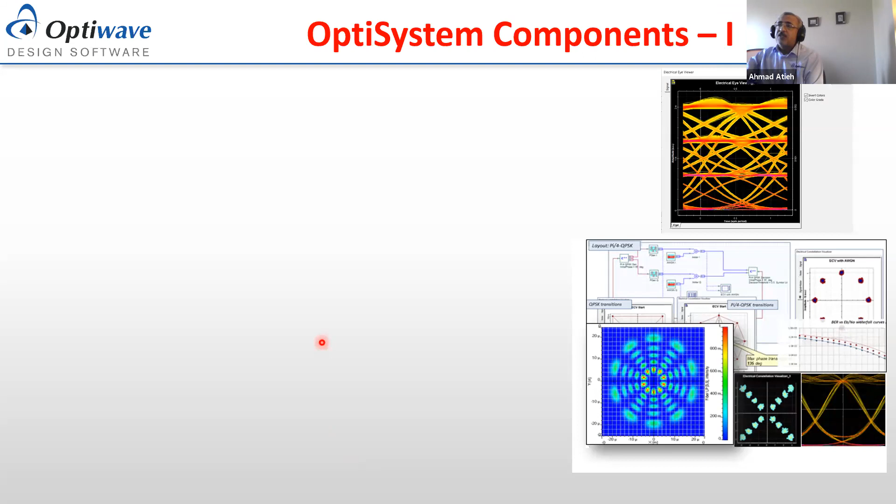Now, Optisystem has more than 540 components, and these components are categorized in directories where you can click on them and use them. This component library can be summarized in a couple of slides here.

The first one is the sources. You have different CW lasers, LEDs, VCSELs, DFB models, Fabry-Perot, white light sources.

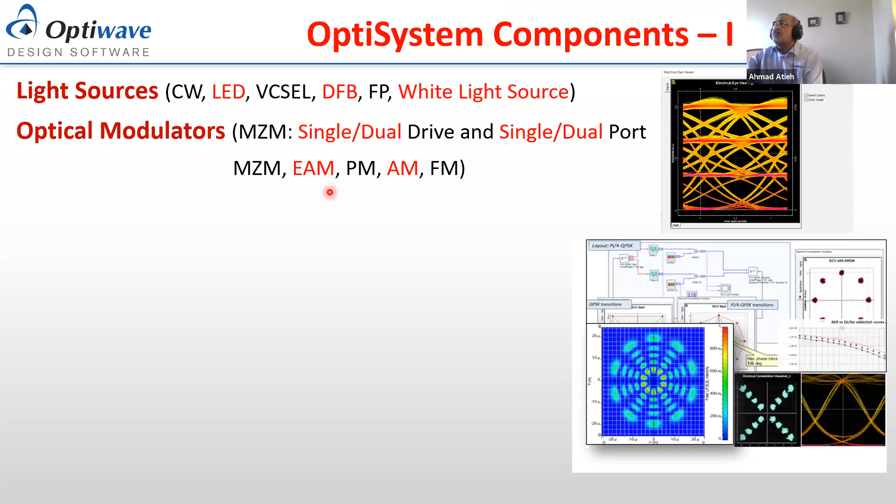Modulators, you have lots of types of modulators. You can have analytical models for Mach-Zehnder modulators, single drive, dual drive, or single port, dual port Mach-Zehnder modulators. Electro-absorption modulators, you also have phase modulators, amplitude modulators, as well as frequency modulators.

Bit sequences: we have components for pseudo-random bit sequences, user-defined sequences, or compliance test patterns as well. Optical fibers: we have single mode fibers, multimode fibers, multicore fibers, which is mainly today's webinar topic.

Also we have electrical modulators which can support OFDM, quadrature modulators. Modulation formats: you have all types of formats, return-to-zero, carrier-suppressed return-to-zero, duobinary. You can support differential phase shift keying, any type of MPSK, quadrature as mentioned, pulse position modulation, and optoelectronic components.

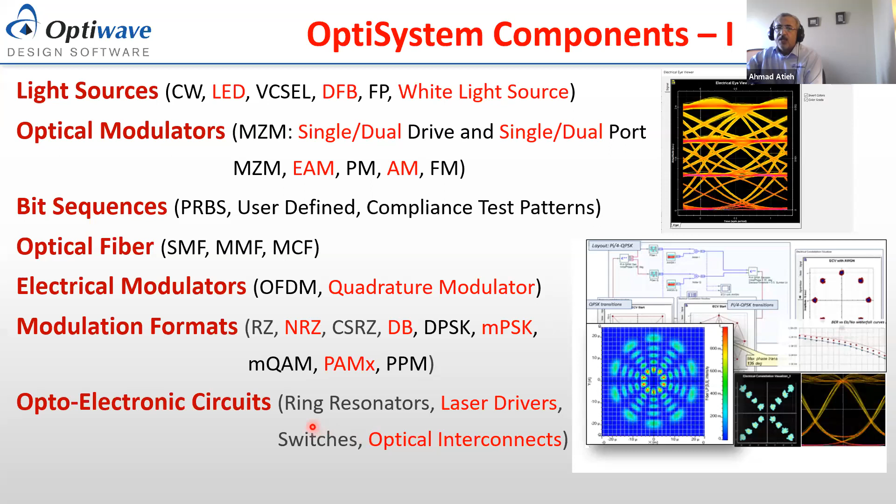With the help of OptiSpice, you can integrate components like ring resonators and optoelectronic components within Optisystem to work together, plus laser drivers. As you can see, there are different switches in the Optisystem component library.

Signal processing: we have very powerful DSP components, equalizers, electronic equalizers, optical equalizers, regenerators—1R, 2R, 3R, depending on what type of regeneration you want to do. FEC and bit mapping: there are different types here.

Detectors, we have our models for the pin detectors, APD. Optical amplifiers, as I mentioned, all types of doped materials are available to do designs, or you have blocks of amplifiers as well. You can do optimization, as I mentioned, for gain flattening filter. We have waveguide as well as models for amplifiers. Electrical amplifiers include transimpedance amplifiers, limiting amplifiers, and automatic gain control amplifiers. Passive components, any component you can think of in the optical domain would be available in Optisystem, from multiplexers, couplers, arrayed waveguides, switches, attenuators, circulators, polarization controllers, and so on.

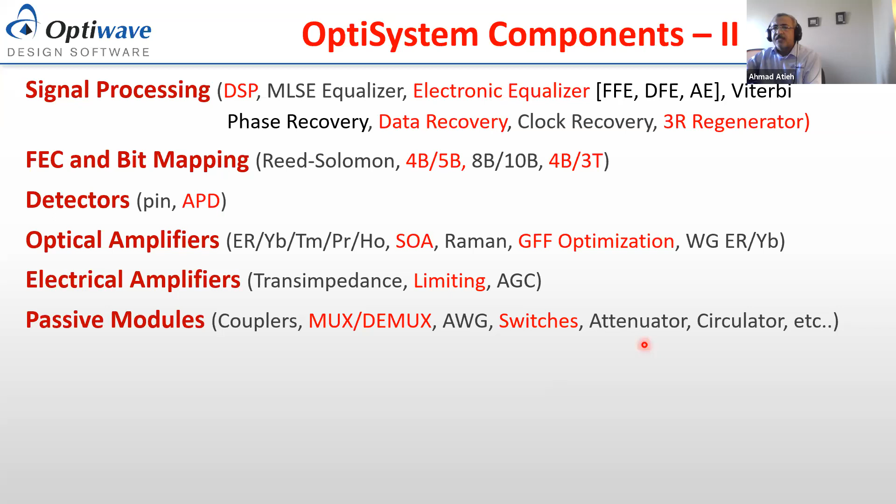Multimode components: you have the fiber, which is multimode fiber, multimode amplifiers, and mode generators. You can work with linear polarized, LG modes, whatever type of modes you are interested in. There are also passive multimode components and spatial visualizers.

Optical channels, as we saw, like we have fibers to support the physical channel, or space wireless channels like Li-Fi, satellite, and free space optics.

Visualizers, Optisystem has a huge library of visualizers and equipment. You can see optical signals with it, electrical signals, binaries, M-ary. There is test equipment as well, and this is coming up in the new release: the Opti instrument component, where you can communicate with instruments and get data from instruments and use it in Optisystem. Most of the components can support bidirectional components, so you can go from east to west or west to east in your transmission systems.

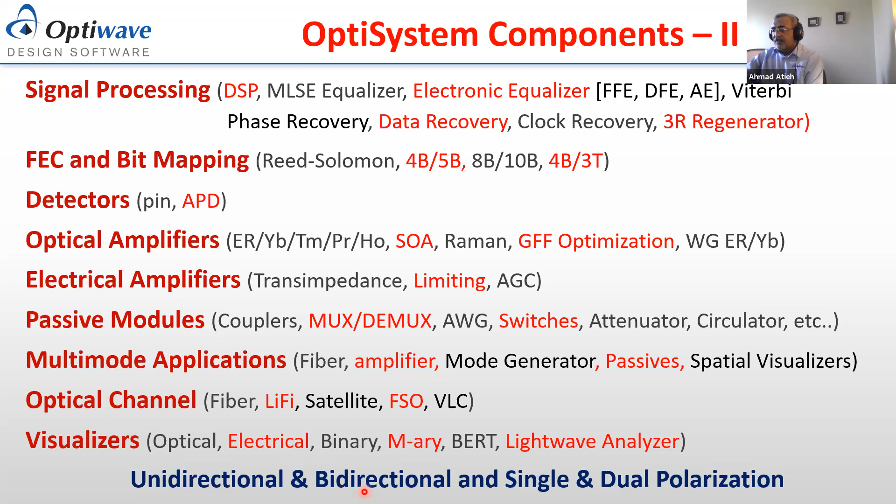Spatial multiplexing through either a few modes where you have a single core multi-mode fiber, or you can use multi-core single mode or multi-mode fibers to carry more channels, and with that you can increase the capacity drastically.

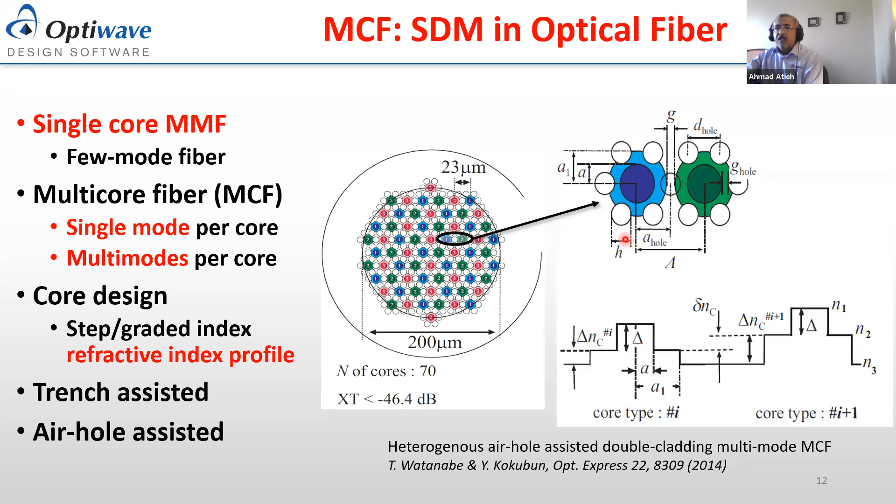In OptiSystem, currently in release up to 18.0, we have analytical models with different components: a multi-core fiber component where you can calculate the crosstalk between different modes, another component for calculating the effect of bending radius on crosstalk, and another for calculating the effect of core pitch between cores on crosstalk.

In the next release, coming sometime in September or early October, we're going to have a new component called Universal Multi-Core Fiber. This component will be able to communicate with OptiMode, so you can design your structure in OptiMode, generate mode profiles and effective refractive index, import them into OptiSystem, and calculate the crosstalk. After calculating the crosstalk, I'll show you later how to take that and calculate the effect on transmitted signals.

Now let me give more details about the analytical models in OptiSystem for the multi-core fiber. This is the structure of the multi-core fiber. You can have core 1 and core 2, and then trenches. These parameters control the radius of core 2, and this parameter controls the trench width and so on. As I mentioned, this component uses analytical models.

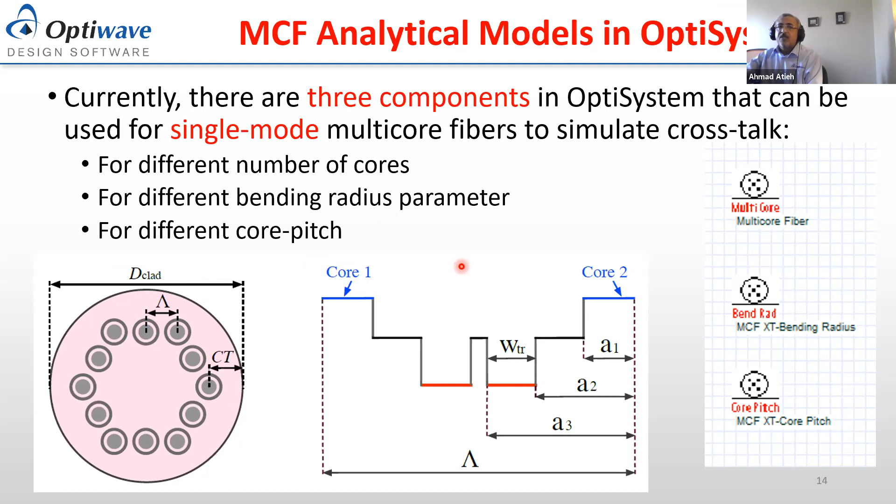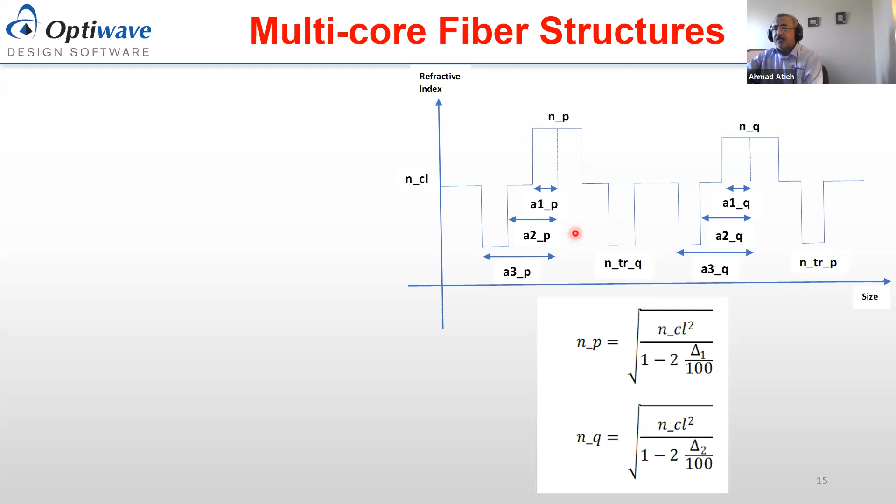In this component, you can control the number of cores, the bending radius, and the core pitch between the different cores. This is a general description of the refractive index profile. You can control the refractive index profile as you see, and then control the different parameters for the cores.

You can simulate almost every possible configuration: homogeneous with no trench, where core 1 and core 2 have the same refractive index profile with no trenches in the design; homogeneous with trench assisted; heterogeneous with no trenches; heterogeneous with trench assisted; homogeneous with one core having a trench and the other no trench; and heterogeneous with one core having a trench and the other no trench.

So the idea here is the flexibility in these OptiSystem components, which again use analytical models to calculate the coupling coefficients and the crosstalk. I'm going to show this to you in a few minutes. It's very powerful for doing all the kinds of simulation you need.

However, if you want to look into multi-mode applications and design your own structure, you can use OptiMode to design the structure, calculate the field profiles and effective refractive index, and then load that into OptiSystem to calculate the system crosstalk.

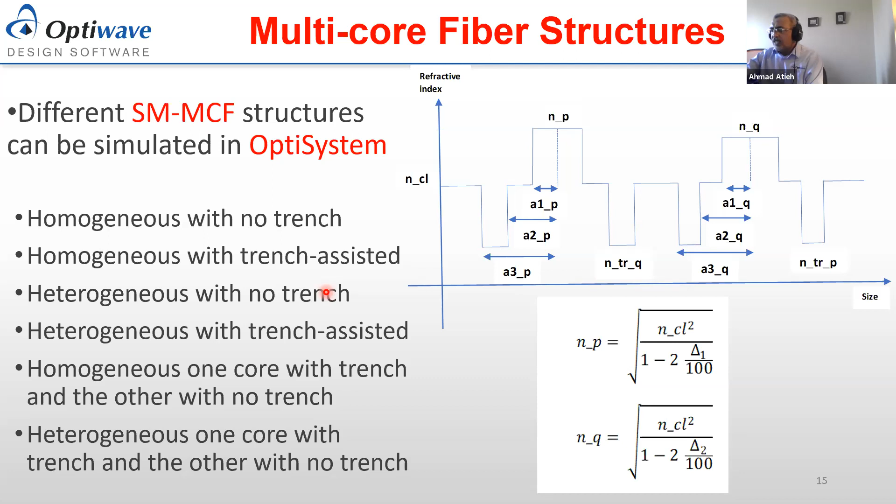The calculation of the crosstalk is based on the coupled power theory. The expression, as you see, is an analytical expression using these coupled equations, and the power for core P as a function of distance is given by this formula, where HPQ is the coupling coefficient between core P and core Q.

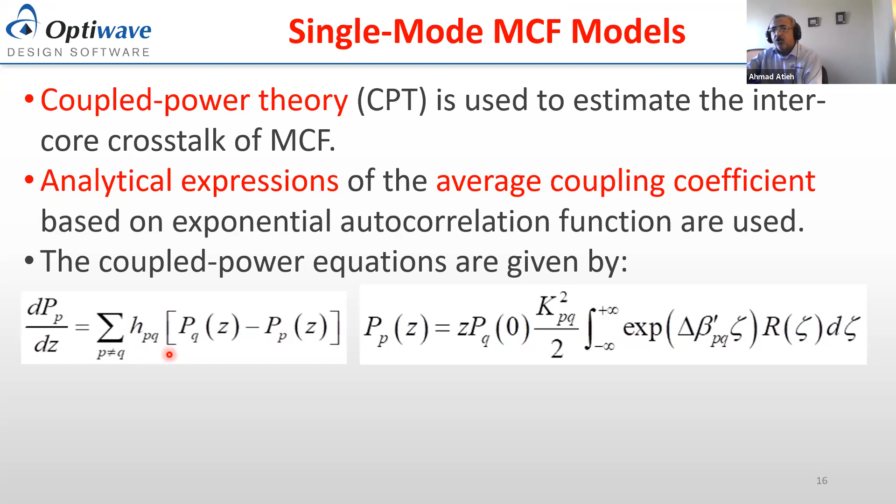In the OptiSystem component, once you double click on it, you get a pop-up properties window where you can enter the parameters: the number of cores, the bending radius, and so on. If you need help setting up the parameters, click the help button to access the component's data sheet, which includes an illustration of how the coupling works.

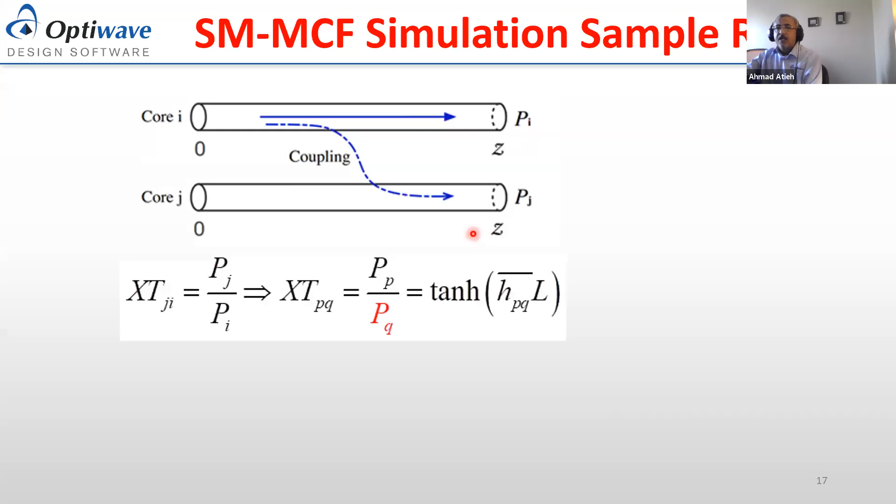So the light is going through, for example, core 1 here. Some of it couples to core 2, which is core j. Then you calculate the cross coupling between the two—the crosstalk between the two cores.

In the multi-core fiber component, you have an outcome of the calculation where you can see the coupling, the crosstalk between the different cores. For example, this is between core 1 and core 2, and core 2 and core 1, and this is core 3 and core 1, and so on. So all the crosstalk parameters are calculated and offered to the user.

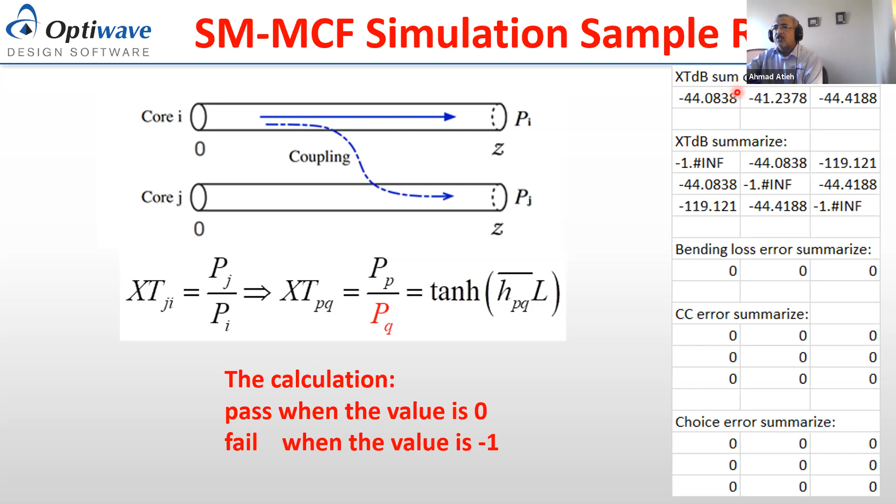This is the total crosstalk for core 1, core 2, and core 3. In this chart, I'll show you the component which models the effect of bending radius. You can sweep the bending radius and get the crosstalk as a function of it. The third component allows you, after designing the multi-core fiber parameters, to see the effect of core pitch when you sweep it, and the crosstalk as a function of that swept parameter.

So these are the three components currently available in OptiSystem for designing single mode multi-core fiber. We noticed lots of people using these models for multi-mode fibers, which we think is not correct because the effect is not correct. So what we did is allow the user to use OptiMode software to design the structure, calculate the field profiles, calculate the effective refractive index, and then load them, as I'm going to show in today's live demonstration.

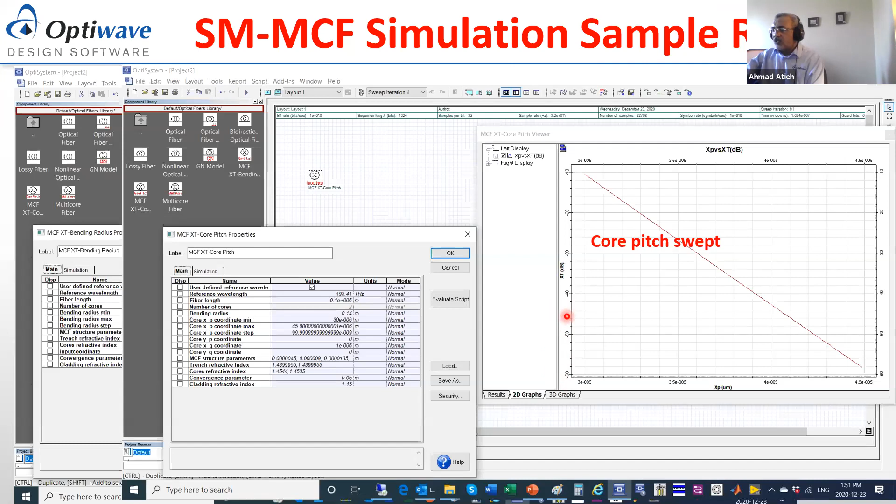So this is an introduction to the new component. The simulation today is done with the CPP component, which you can find in OptiSystem's component libraries. Eventually the universal component will be a standalone component in OptiSystem, where you can use OptiMode to design the structure, calculate the mode field profiles, and get the effective refractive index profile for each mode in different cores, and load them.

Now, the process of designing the multi-core fiber - we did a webinar on this a few months ago, and you can find it titled Multicore Fiber Designs and Analysis on our website, optiwave.com.

Now, the next step, after you calculate the crosstalk between the modes in the different cores or the same core, is to do the simulation to check how the system would be affected by the transmission of signals at the system level.

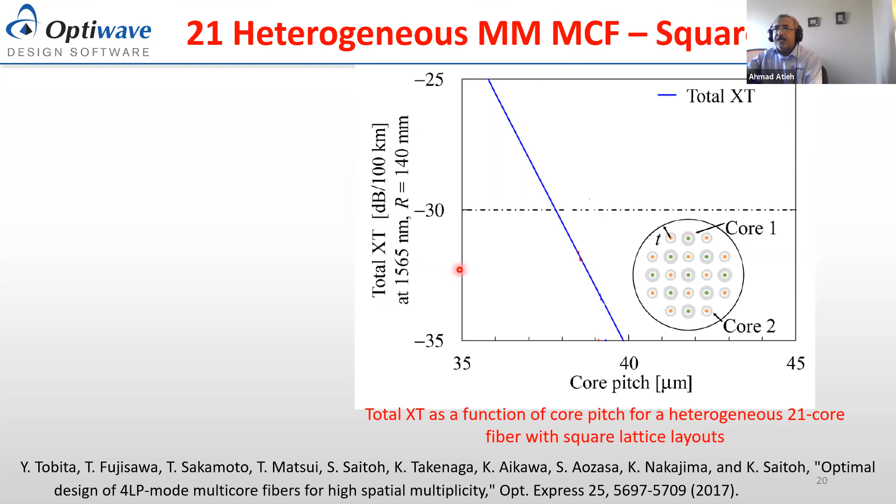And here you can calculate the total crosstalk as a function of the core pitch. This is what we're going to demonstrate today in the live demonstration.

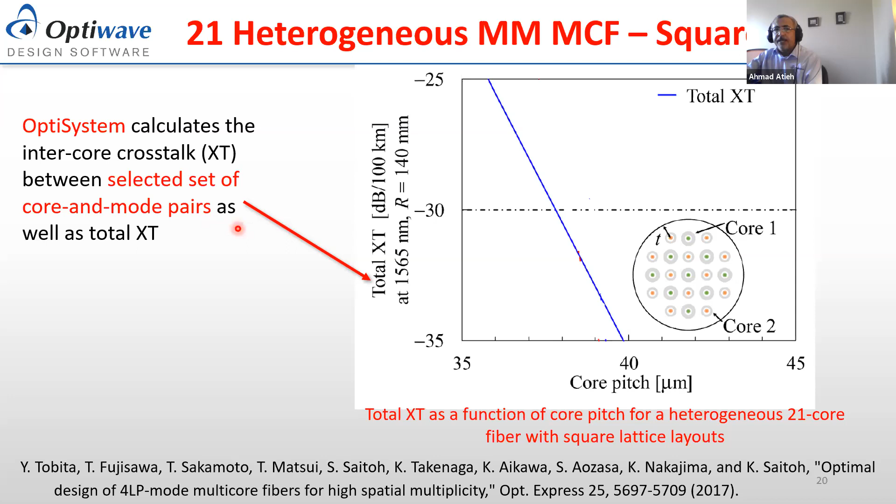Now, the crosstalk in OptiSystem will allow you to calculate the inter-core crosstalk between the selected set of core and mode pairs, as well as the total crosstalk.

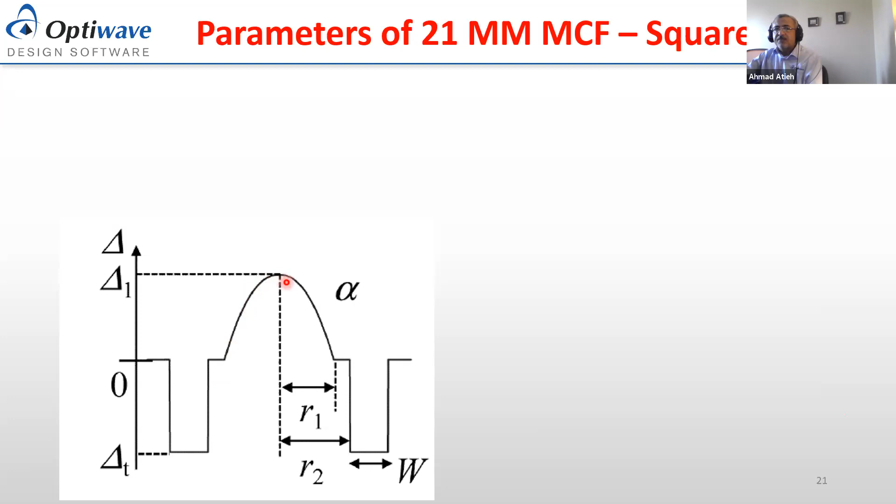Now, the example has a structure as you can see here. The core is a graded index profile with an alpha profile, and then you have the radius of the core, the radius which defines the width of the trench, and the other parameter R here, which defines the distance between the core and cladding. Then there are different parameters: the refractive index, the relative refractive index parameter, and all these parameters are taken from the reference.

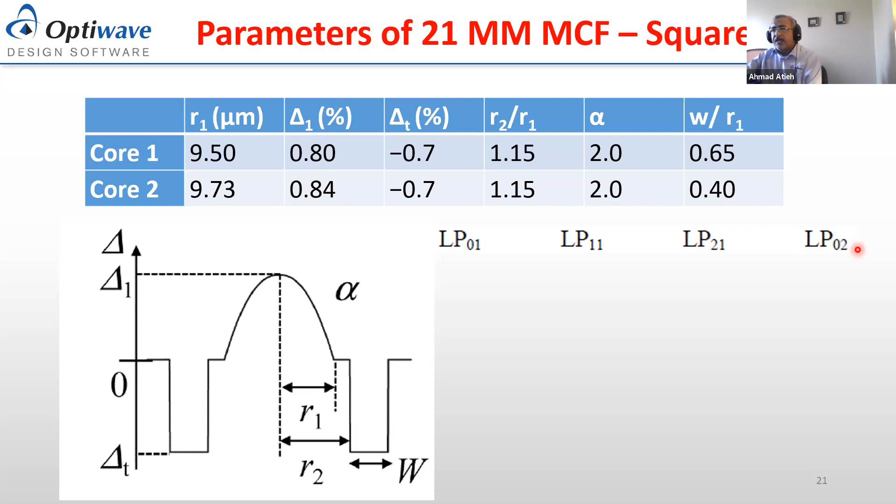This design allows 4 modes to propagate: LP01, LP11, LP21, and LP02.

Now, the crosstalk is calculated as a function of the core pitch, as I mentioned earlier, at a specific bending radius of 140 millimeters. In this component, you should also be able to sweep the bending radius if you want. So you have the capability to sweep the core pitch, sweep the bending radius, and control, as you can see here, the propagation length.

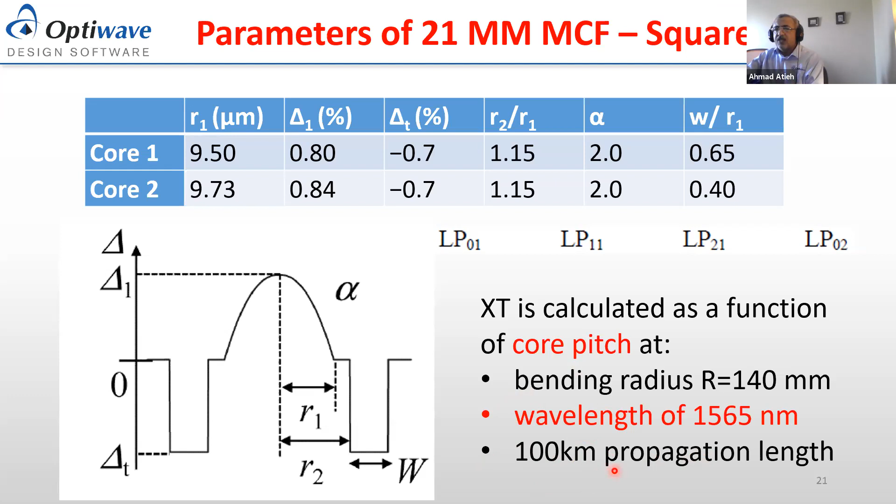In this chart, just to show you the LP modes for that fiber, you have 4 modes here: mode 1, 2, 3, and 4. This is the structure of the modes, the intensity of each mode. And these modes, again, are going to be designed in OptiMode software.

So you use OptiMode to design the structure, which is, as I showed you in the previous slides, a 2-core with a trench, a very simple design. This supports 4 modes, and these are the different modes. This is mode 3, and this is the 4th mode, which is LP21 here, as you can see.

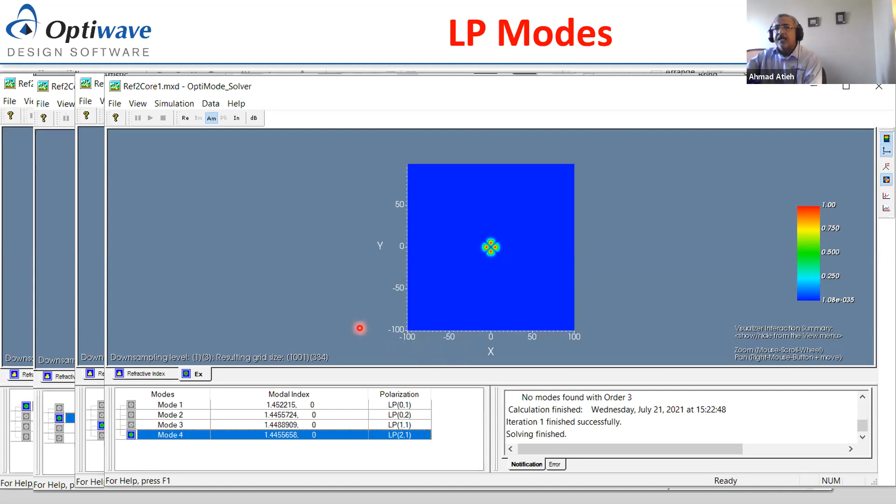All of this information is available in OptiMode. As I mentioned, you can go to the webinar on the Optiwave website, and go through the process of how to design and operate the OptiMode software.

So the example here we created in the CPP component, 4 examples - if I remember correctly, 3 or 4 examples. Our team has created these examples based on published work, some of which includes only theoretical calculation, and some also experimental calculation. That gives a kind of confidence about the models and the calculations being used.

Now if you double click on the component, I'm going to show it to you - you're going to have access to the component properties. In this window, you're going to see that this is the project browser. You can see the graphs generated for crosstalk and also the outcome of the calculation.

The instruction for how to use OptiMode and OptiSystem is described in the information here as well. All of this information would be easier once we have implemented it in the next release as a component in OptiSystem. Okay, let me just check - I think there's one more slide here.

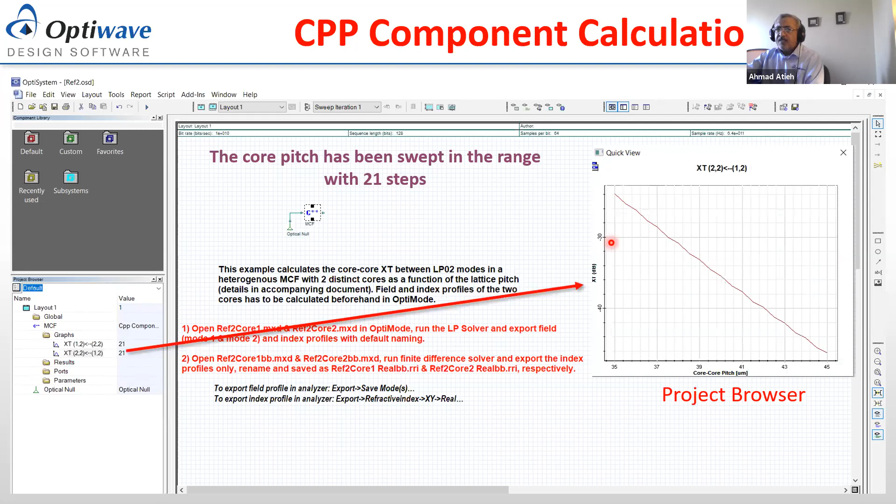This is the result of the calculation, which I'm going to show you in the demo and compare it with the published paper. Now OptiSystem, this software right now can also give you a text file, which describes the crosstalk for all the cases here.

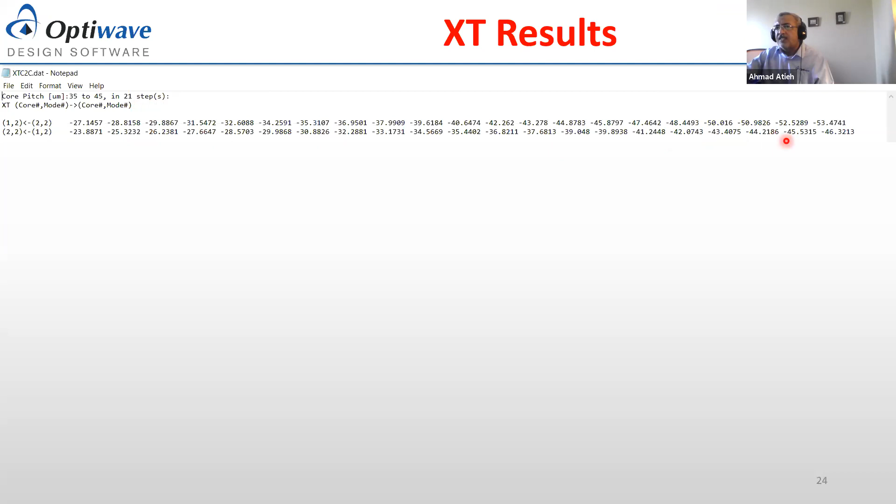Because we swept the core pitch in a range between 35 and 45, in 21 steps, you get at every step what would be the crosstalk between the modes. And this is the published paper reference, and this is what we got from OptiSystem - you can see there is a very good agreement between the two simulations.

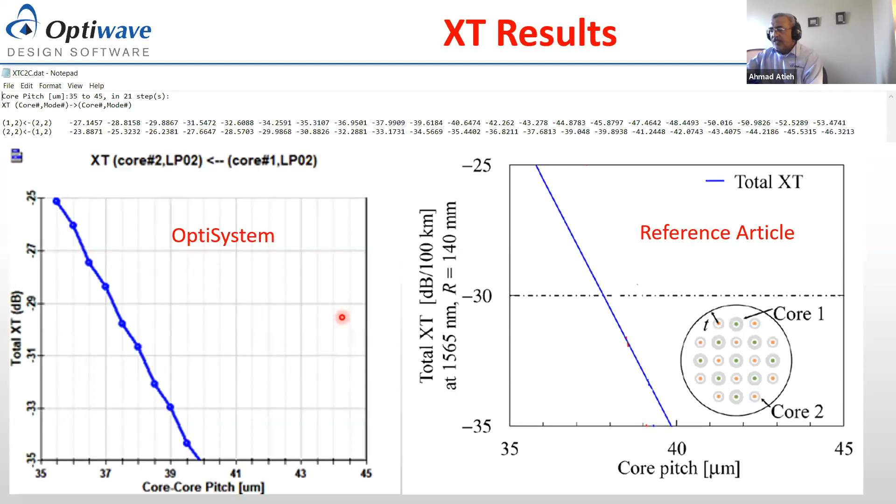Now the other part which is very important in this simulation process is to study the effect of the crosstalk parameter. So you did the design of the multicore fiber, you looked at the crosstalk, and then what's the value of that? The value is to implement it in a system using the modulation scheme you are interested in, and then do the transmission and look at your system performance.

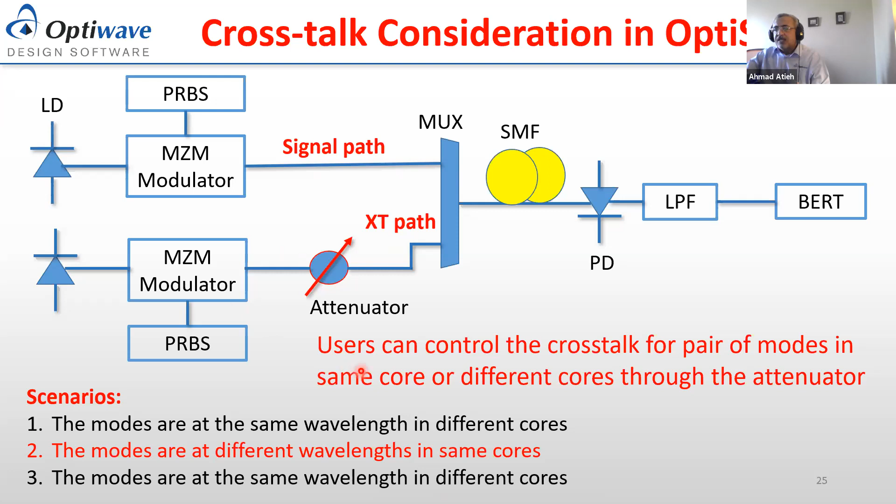You can control either one of these scenarios - you can have modes at the same wavelength in different cores, or modes at different wavelengths in the same core, or modes at the same wavelength in different cores. All of these different possibilities can be simulated using this kind of implementation.

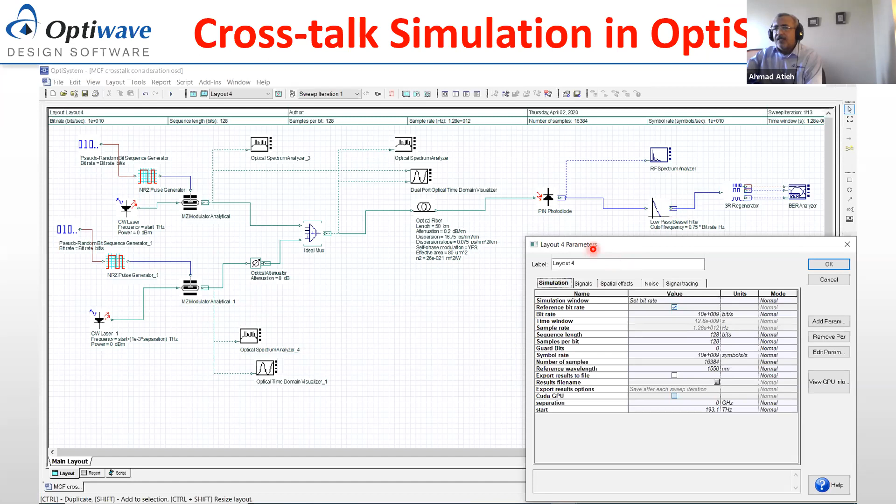And this is the implementation I'm going to demonstrate to you shortly - it shows all the components. Right now I'm using non-return to zero, a very simple scheme, and this shows you the way to set up the configuration.

Okay, so now we're going to move into the live demo. It includes, as I said, the multicore fiber component using the CPP component at this moment, and the crosstalk consideration in OptiSystem. So if I move into the OptiSystem software...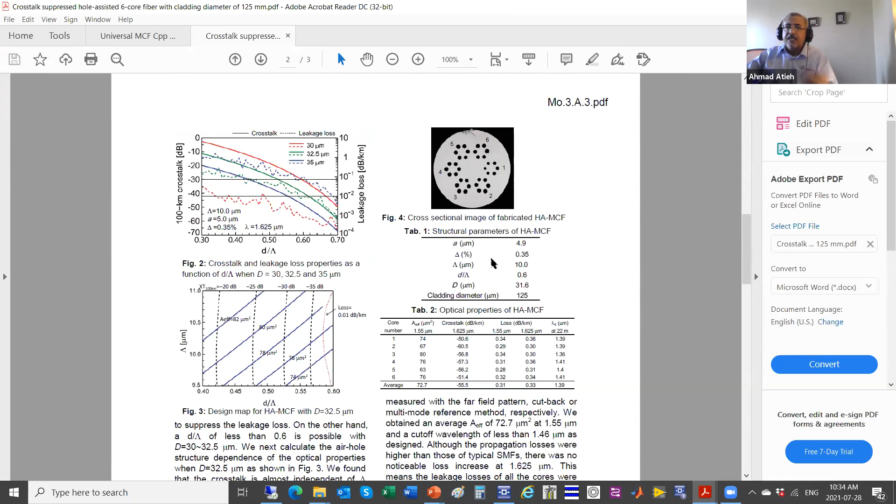And then this is, as you can see, the reference which is used to verify the models and the results. And all of these results have been verified, as you see.

Now in terms of the component, as you can see here, if you double click, this component is a development environment, which is something we'd like users to use if they want to develop their own codes, and then eventually create the drivers.

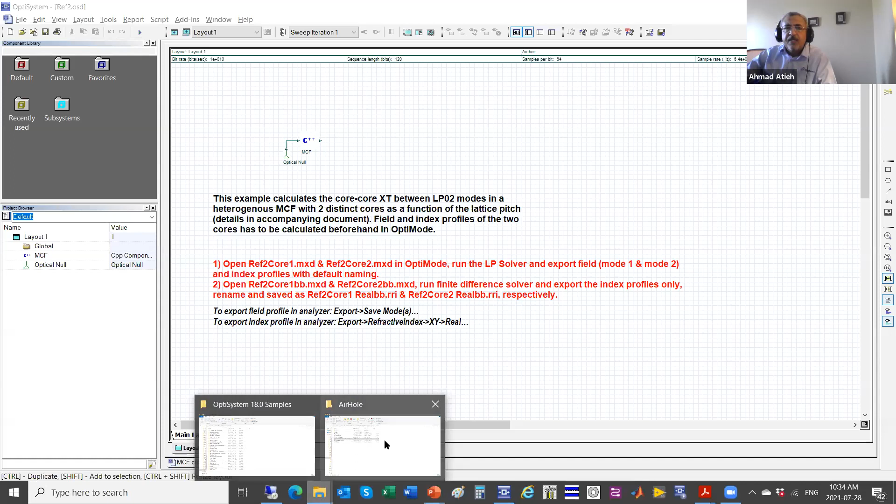As you see here in every component, there is a driver. Let me go back to this demonstration example. This is the driver, which is created from this component and has to be loaded with the component. If you go to the component here and double click on it, you can see this loads the CPP driver, and this has to be loaded.

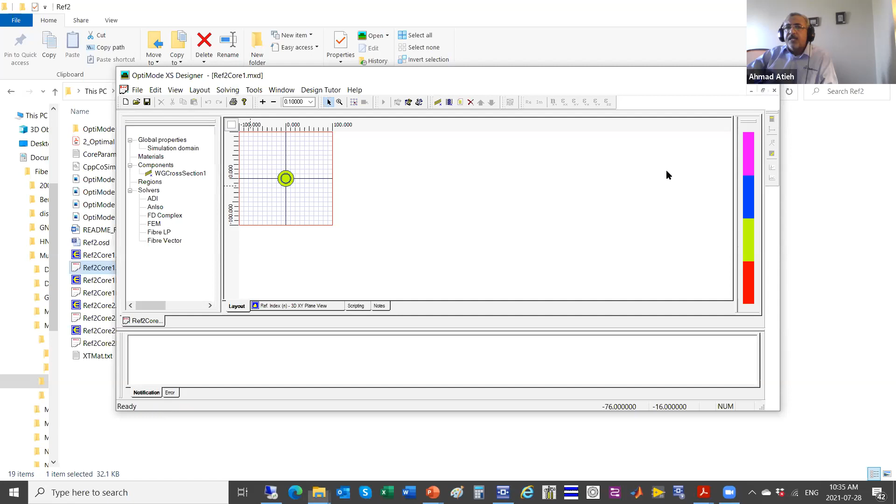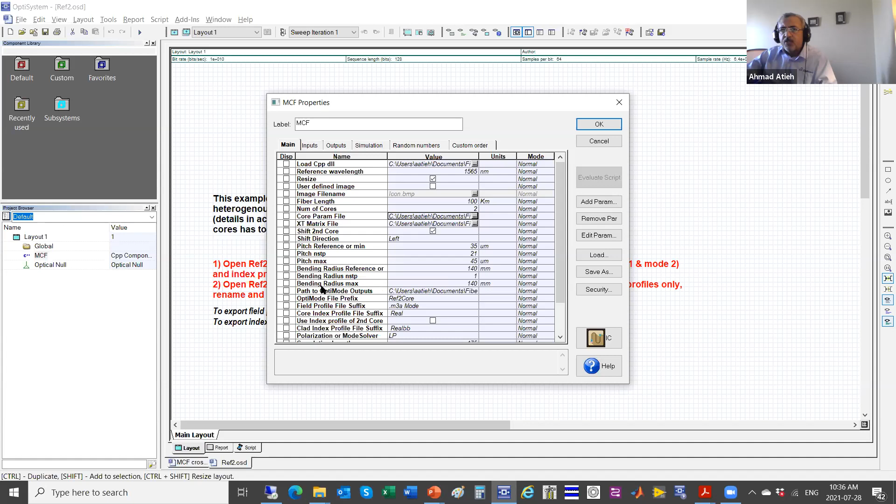Once you calculate, you load the field profiles, as you can see here, into Optisystem components. You take the path here, and then you load the files you need. Once you load the files, basically for the effective refractive index and the field profiles, you can set up the pitch, minimum values, and so on. You have a capability to do sweeping of the core pitch, or you can sweep the bending as well.

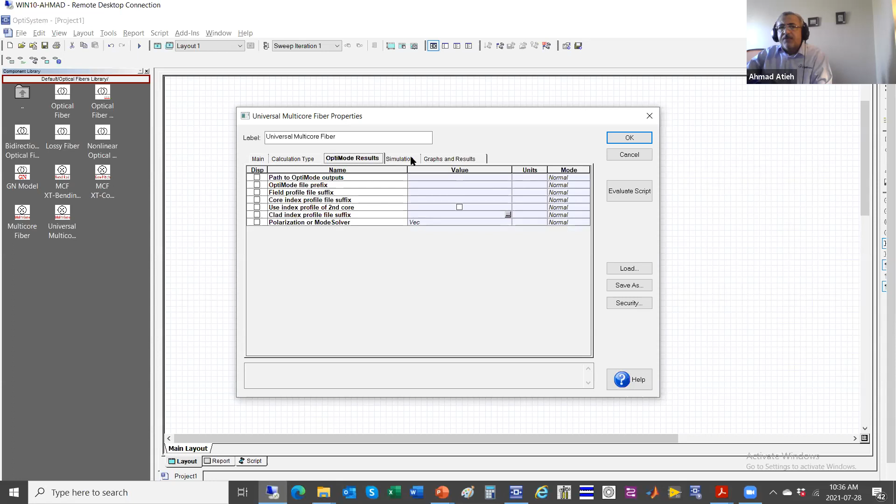This is the new component which we are working on. It is going to be a standalone component located in, like, the default optical fiber library. In it, you can set up all these parameters in a standard way. This is going to come up in the September, October time frame in the next release.

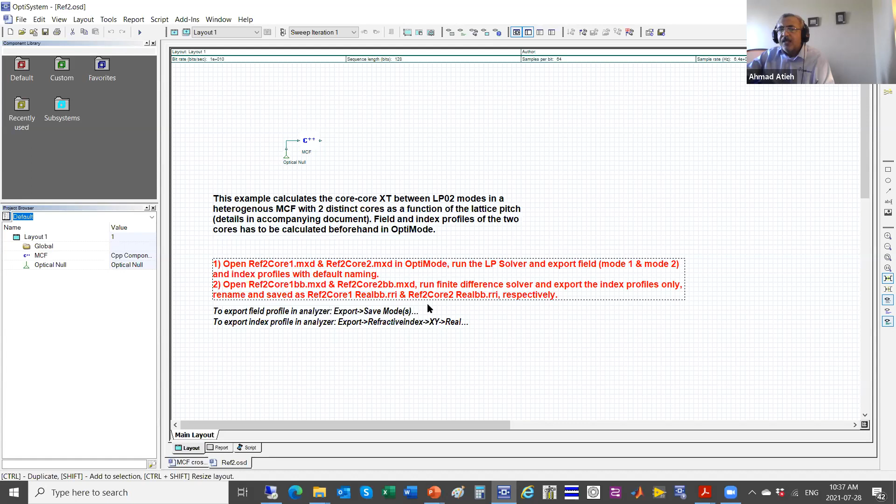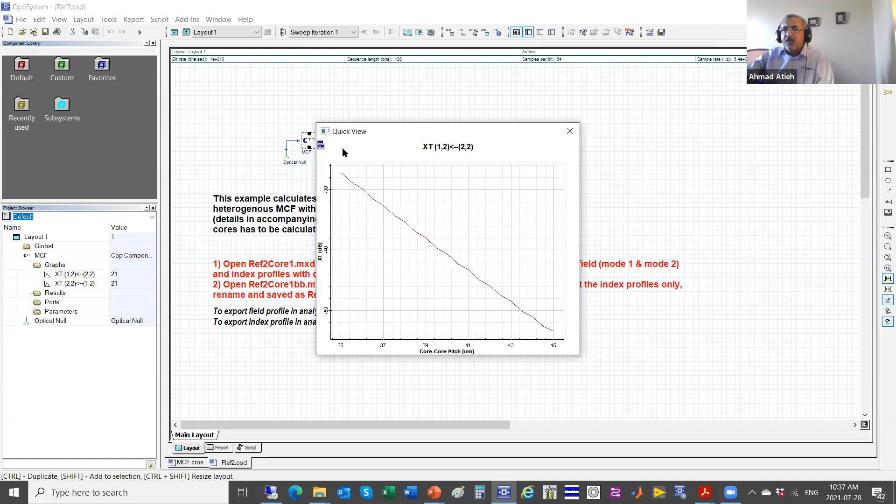Once you enter these files, there are instructions on how to operate and create the field profiles and index profiles. You load them, and then you do the calculation. Once the calculation is done, the files are loaded into Optisystem and graphs are generated here. These graphs you can download, exactly similar to any graph in Optisystem. There's also a file that tells you if you have any errors or types of errors in the calculation.

Now, if you go into one of these text files, you can see this is the OptiMode results, and this is the crosstalk file, where you have all the crosstalk at every step. The core pitch here is swept between 35 micrometers to 45 micrometers, and at every step you see the crosstalk between mode 2 and core 2, mode 2 and core 1, and so on. So you can define the crosstalk parameter, which modes and mode pairs in which cores you want to do the calculation on.

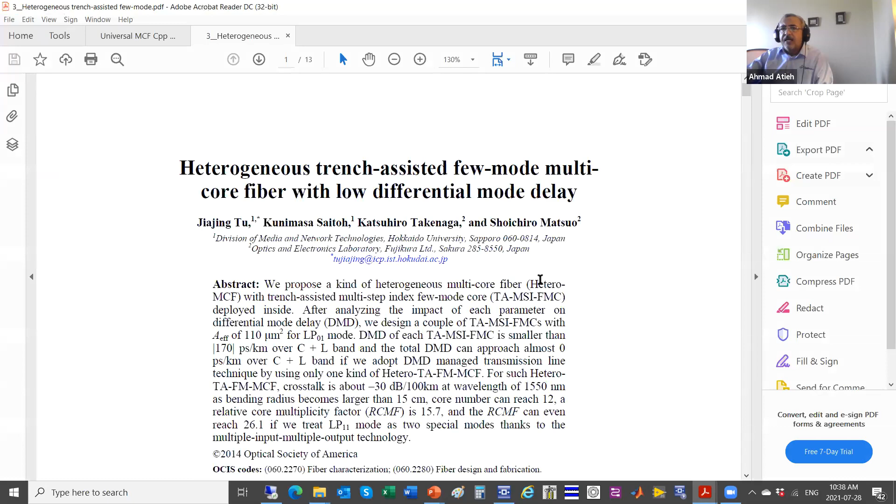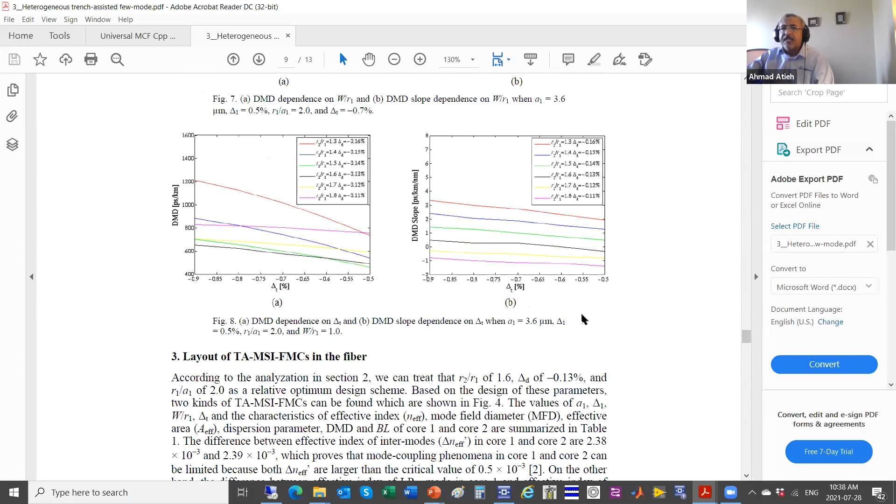So this example is, again, we have 4 examples. This is another example, and this is the reference for it, which you can also look at. This is the profile, and this is the paper, and we are able to generate exactly the same curves in this design. So this is something you can use as guidance for your specific designs.

Okay, so that's one thing. The other thing I wanted to demonstrate is the transmission system. As I mentioned, you build your own system. You have the default components and libraries, and in the components you can select what's required from transmitters, all these components. If you don't know the component, just click in this area and find component, search for it, and find the proper one.

Now this system is built here with two lasers. This laser is scripted with information as 'start', and this one is scripted as 'start plus a shift', which is based on separation. These two parameters are scripted and added up in the global parameter here, as you see. One of them is the separation, 100 gigahertz, and the start is 193.1. So you can select the wavelength of operation in the global parameter, and then set up your separation.

So if you wanted to do the crosstalk simulation between the same wavelength in different modes, you can put these at the same wavelength. If you have different cores at different wavelengths, you can select the wavelength separation and set up the proper wavelengths. Then in the attenuator, you can set up the attenuation.

In this example, what I did is just the sweep between them, only to demonstrate the effect. Eventually you can set up the fiber based on your system and look at the bit error rate, or whatever depends on the modulation scheme.

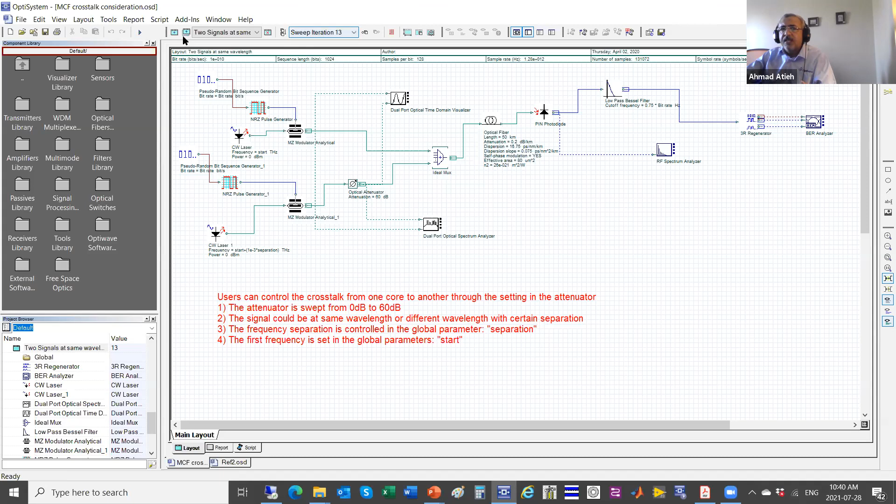You can look at this, but the core design is this block here, basically, where you create the effect of crosstalk into the system. Once you run this system, it's going to take some time, but I didn't run it ahead of time, honestly, so we can run it right now and maybe start the Q&A.

As you can see here, it's going to go through the iteration one by one. Once it's done, you can look at the progress here, and then eventually we can look at the effect of crosstalk on the performance.

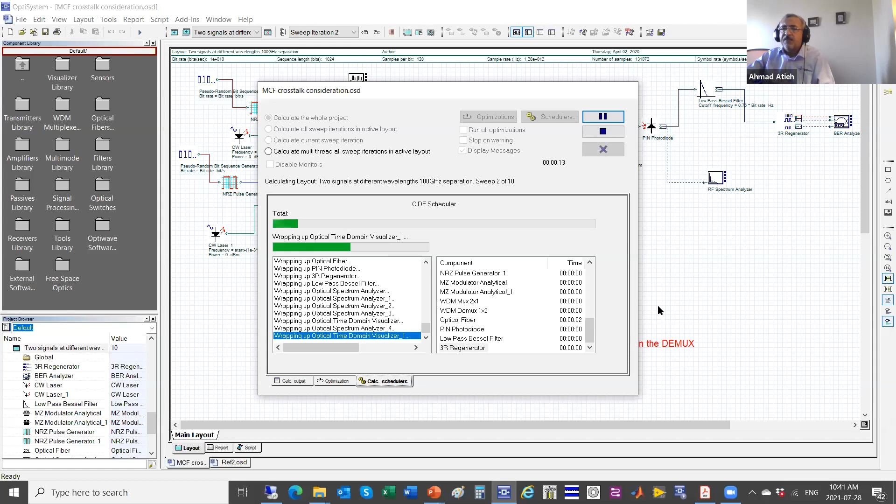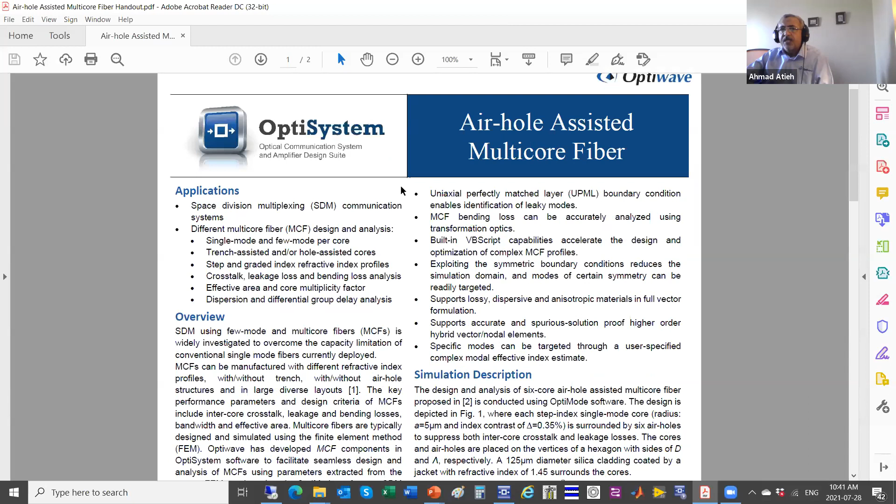Let me move on into the back here to show you. This is one of the handouts. We also wrote about air hole assisted multicore fiber and described the whole process, the application, and the comparison. This is the design using OptiMode, and the comparison with published papers.

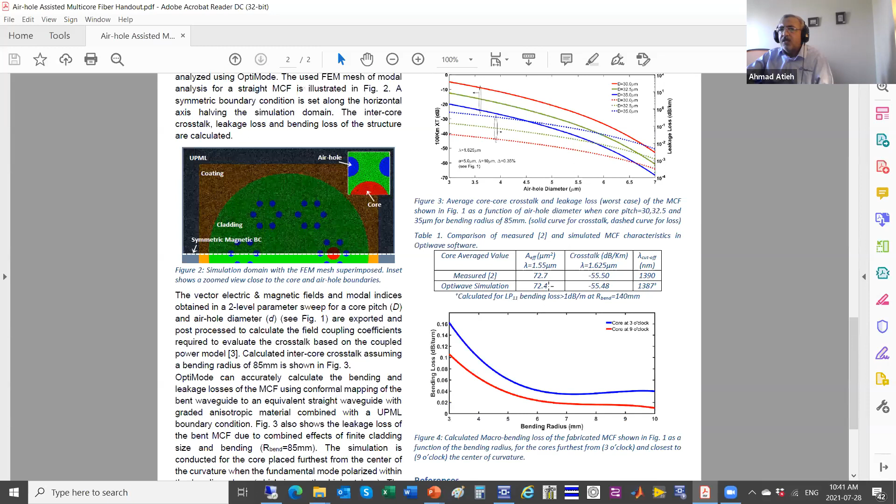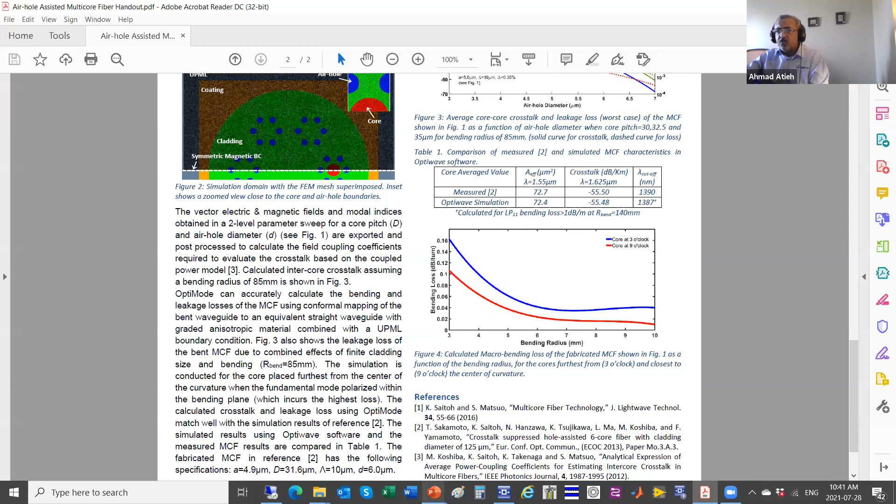As you can see, this is one of the good resources. The webinar on the Optiwave website is also another good resource which you can look at for future applications. So now with this, I'm going to pause and open for Q&A. Thank you very much for listening.